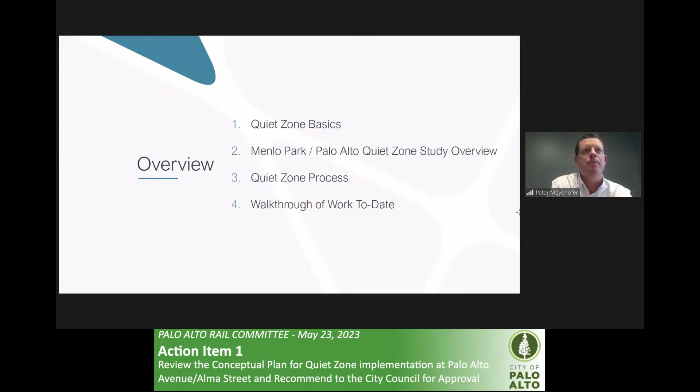Okay, so just a short presentation here to talk about the quiet zone feasibility study we've been working on with both Menlo Park and City of Palo Alto—where we're at, some of our results, and next steps in the overall project. So we'll start with the quiet zone basics: what is a quiet zone, the specific study we're looking at in relation to Menlo Park and Palo Alto, the quiet zone process, and again where we're at to date and what would be left to bring this project to a conclusion.

So just some basics. Why do trains sound their horn? Railroads are regulated by the Federal Railroad Administration, the FRA. The FRA requires train operators to sound their horns as they approach areas where the railroad intersects a roadway, a railroad crossing. The train horn acts as a fail-safe in the event the warning devices, gates, or bells don't work or don't prohibit a person or vehicle from entering the crossing.

The train horn is essentially supposed to be loud enough to catch attention, usually a specific volume somewhere between 96 and 110 decibels. In addition, operators have to sound their horns beginning about 20 seconds prior to entering the crossing.

A quiet zone is a section of railroad in which the train operator does not need to sound the train horn as it approaches a crossing. For a quiet zone to be implemented, a crossing or set of crossings must meet certain safety thresholds as determined by the FRA. Most crossings would not qualify for a quiet zone in their current state, so upgrades are typically needed to make them safe enough that a horn does not need to sound.

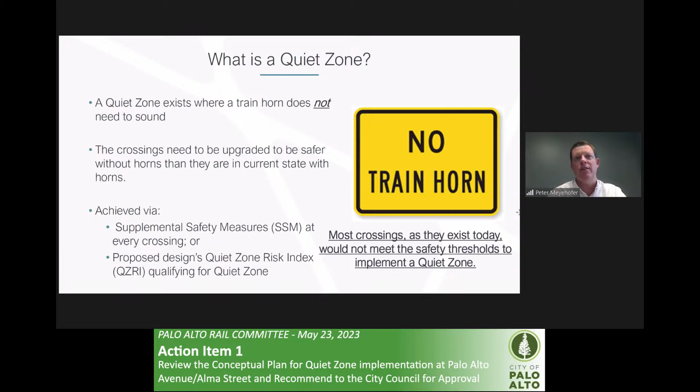This is achieved by adding supplemental safety measures, or SSMs, at the crossings, and ensuring that the overall quiet zone risk index, measured by specific FRA formulas, for the crossings or set of crossings qualifies under the FRA guidelines to be a quiet zone.

So the process - we're in phase one of the study still, but getting close to completion. The four main components are agency coordination, putting together concept design based on input from agencies and stakeholders, public outreach including meetings like this one, and a final report. The future phase would include implementation, permitting with CPUC and Caltrain, putting final design construction documents together, getting funding, and then construction and final FRA certification.

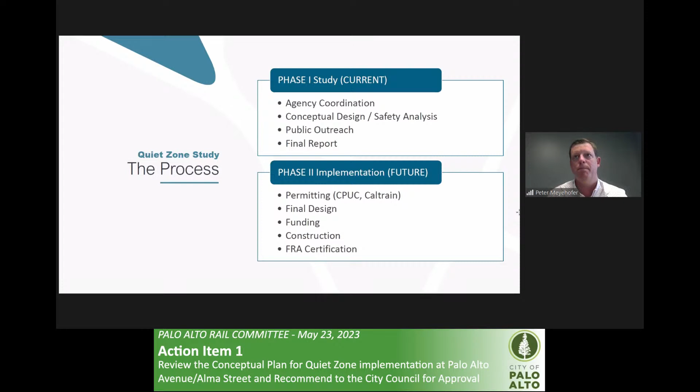There are a lot of stakeholders involved with any rail corridor, as you're aware. This includes Caltrain, Caltrans, FRA, CPUC, both cities, and Union Pacific Railroad, who has rights in the corridor as well. All of them were invited to our field meetings, doing a field diagnostic meeting at each of the crossings that were part of the quiet zone study, which we'll talk about.

The quiet zone being discussed here this afternoon spans about 1.5 miles, beginning at Encinal Avenue in the north and ending at the Palo Alto Alma Street crossing in the south, in the city of Palo Alto. The quiet zone as a whole would encompass railroad crossings at Encinal, Glenwood, Oak Grove, Menlo Park Caltrain Station, Ravenswood, and the city of Palo Alto's Alma Street crossing.

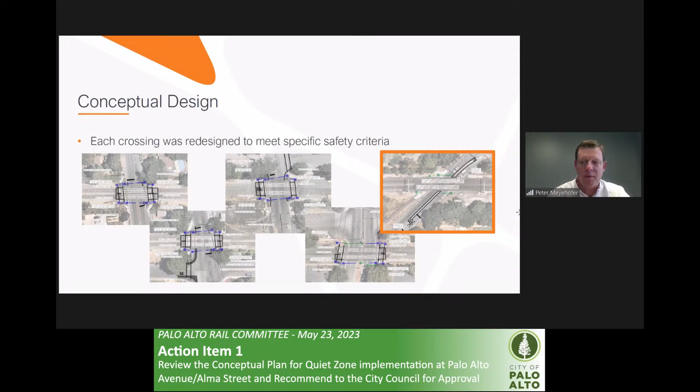The main improvements are sometimes sidewalk realignment, and typically with all of them, refreshed roadway striping and updated signage. The 4-quad gates are typically the improvements needed for the Menlo Park crossings. However, for the Palo Alto Alma Street crossing, we are only looking at having to do a raised median - we will not need to do 4-quad gates there.

All of the crossings are going to have refreshed roadway striping and updated signage. Sidewalk realignment is typically required where you have the 4-quad gate installations, due to the added gate assemblies that are put in, and as a result, the sidewalk realignments are needed. However, for the Palo Alto crossing, where we're not doing a 4-quad gate system, we won't need to do sidewalk realignment there.

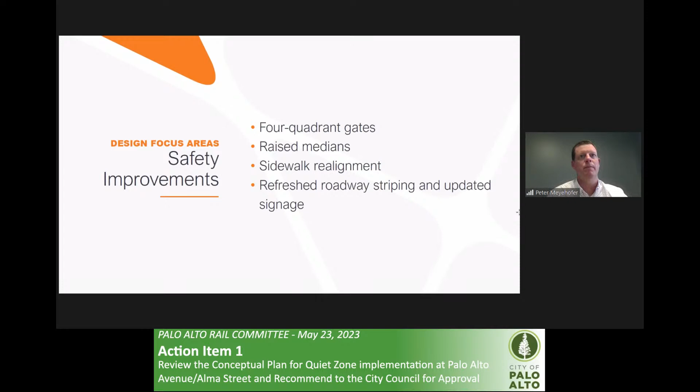Here's a quick graphic describing what a 4 quad gate system looks like. It essentially seals a rail corridor from vehicular traffic and the potential for vehicles to drive around the gates if there were only 2. Four quad gates are a typical supplemental safety measure that reduces the risk associated with a crossing under FRA guidelines. These measures are only being proposed at the Menlo Park crossings.

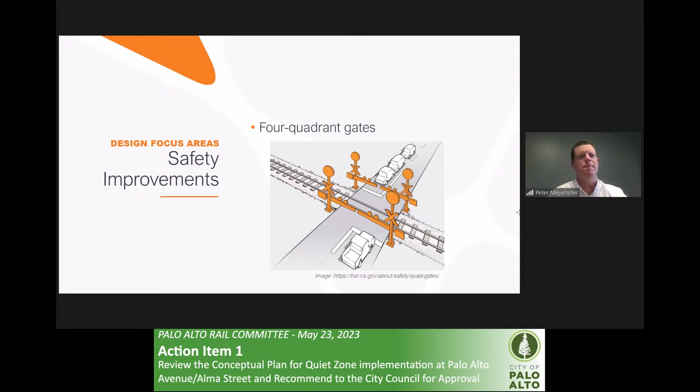Raised medians, designed high enough that a standard vehicle wouldn't want to drive over them, act in a similar manner to a 4 quad gate system, but with less infrastructure and signal requirements, and therefore generally much less costly. It still prevents vehicles from driving on the wrong side of the road to move around the gates for the 4 crossings within Menlo Park, but is the main safety improvement for the Palo Alto crossing. Raised medians are another acceptable type of supplemental safety measure that reduces the risks associated with the crossing under FRA guidelines.

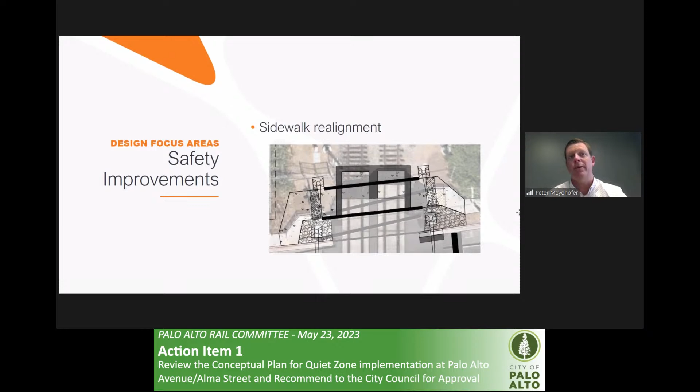With all the crossings, we'd be looking at just doing refreshed striping and marking on the roadway, and new signage. Sometimes signage is out of date, not to standard, or not in the correct location, so typically all the crossings will have upgraded signage and striping. This is also a typical requirement from regulatory authorities for a quiet zone corridor.

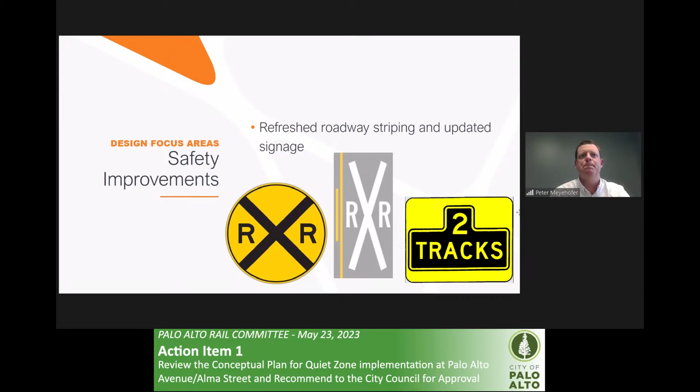At Palo Alto Alma Street, we proposed reconstructing the medians near the crossing to meet federal minimums with respect to both length and height. This crossing is the only one in this project where reconstructing the medians is actually a viable option. Because we're proposing to install new medians, the 4 quadrant gates are not necessary here, nor is a reconfiguration of the sidewalk. So what you see there in green, those are the existing.

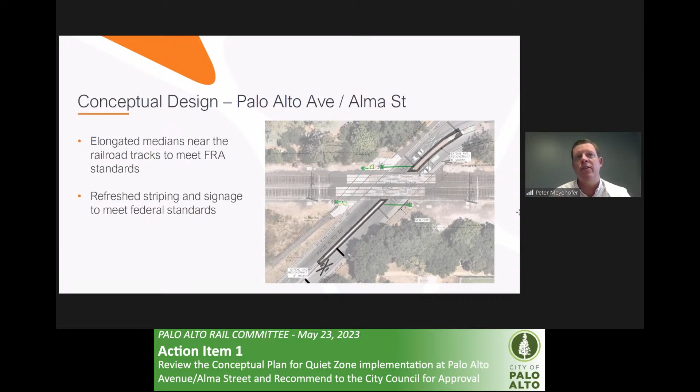Another component of this first phase of the project was public outreach, where we had public meetings with the general public. We've had a number of meetings with both City of Menlo Park and City of Palo Alto boards and committees. Throughout the process we've been getting good feedback and implementing that into our designs, which will help us finalize where we're at with this current study. That will be a final report summarizing everything we've discussed in the concept designs, shown on the next slide. The final report summarizes everything we've done, the concept designs, and provides recommendations to the cities on what would be needed for implementing the quiet zone in both municipalities.

The next phase, once this is done, would of course be final design and permitting through CPUC and Caltrain. With CPUC, that would be the GO 88B application process. And of course, getting funding for the required work. That's it. Open to any questions.

Thank you. So first, let's see if we have any members of the public who wish to speak on this item. Thank you, Chair. We do have a couple of requests to speak.

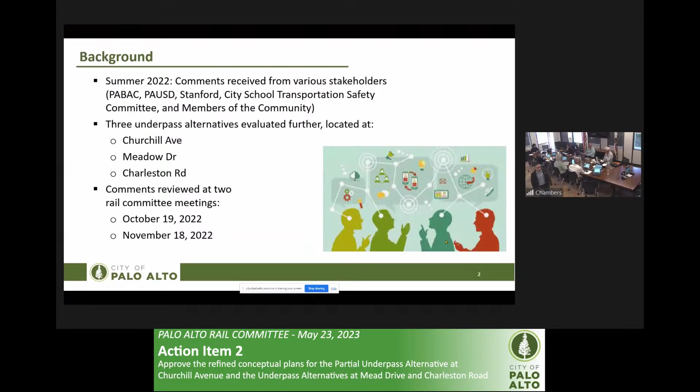I'll just briefly summarize again: in summer, some members of the community design engineers were involved in the early design of the grade separation alternatives. Seeking their feedback and comments, we conducted study sessions with the rail committee and got their direction on discussions of measures we could incorporate in refining the alternatives.

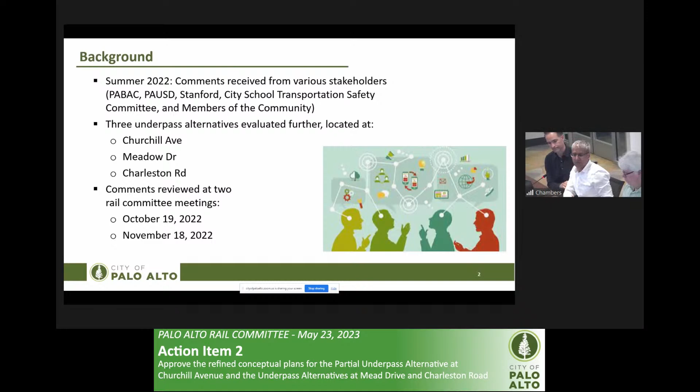So with that, Peter, you can go ahead and provide the updates.

Very good. Thanks, Ripon. I'll first want to start off — my name is Peter DiStefano, I'm with AECOM, I'm a civil engineer. I want to concur with what Phil said earlier about 2 years being a relatively short duration in the grand scheme. When I first started on this project, I didn't have any white hair.

Kidding aside, let's dive right into the design revisions. We're going to first talk about Churchill, and then I'll pause there. If you have any questions about Churchill, then we'll proceed to Meadow and Charleston.

On this first slide, we increased the ramp width in the center of Kellogg to provide a little bit more room for pedestrians and bicyclists, increasing it from 10 to 12 feet. We also met with the fire marshal in November, and to accommodate emergency vehicles, Kellogg was widened about 5.5 feet on each side of the road to provide 16-foot lanes, as you can see on the typical cross section.

Tree removals and relocation of the overhead electrical lines will be required to accommodate the widening. The back of the sidewalk will remain where it is today, and no property acquisitions along Kellogg would be required in this configuration.

It's not clear in my mind why there's a triple bike path between the actual tracks and the Palo Alto Sports Stadium. It seems there are three bike paths there, and one is offset in the center by height. I'm curious why that is.

Throw that back for a little more thought. I don't think that's quite an optimal solution there. I think you can have that intersection with a two-way bike path.

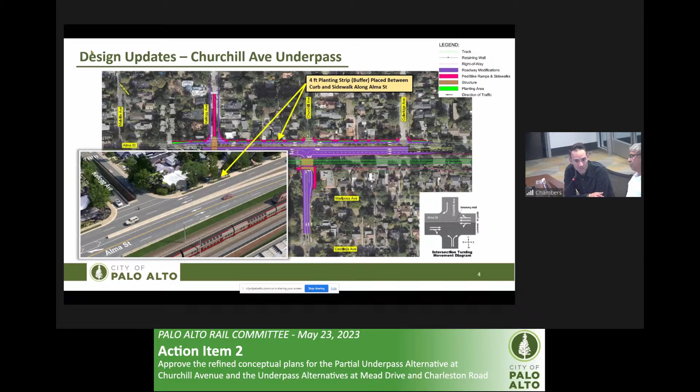Oh sorry, apologies - the current layout would need to go under what is existing bleachers partially. So it could be that the bleachers actually don't need to be relocated, they just need to be redesigned. It could be that we have bleachers going over part of this bike path - that's a possibility, just depending on design. But we haven't gone to that level of design at this early conceptual phase. It's just noting that the current layout would overlap with a portion of the current bleachers. Got it, so that's all kind of TBD.

And if I might add, on the current bleachers it's not really feasible to relocate them. I know those pretty intimately - I spent half a dozen years on the chain gang for the football team on that side of the field, the visitor side, and there's no room. So it either would be to reduce the size - if you were not able to build underneath it, you'd have to reduce the size of the visiting bleachers, or move the entire football field, track, and home field bleachers on the other side. So okay, I wouldn't hold my breath on that.

That's exactly what I was wondering, was how potentially involved, how big of an ask, that kind of thing. And I want to add another complexity to that - that Embarcadero bike path is also in Caltrain's right of way. So it's going to be a 3-party agreement and negotiation - not only city and school district, but also will bring in Caltrain and JPB into that conversation. So it's becoming more and more complex.

Got it, so it does sound quite complex on the Paly side, although I am sympathetic to the homeowners on the other side with the 4-foot buffer. We talked about that if we have that, the benefit is to the pedestrians being distanced from the car, and also the recycling bins. But I would suggest that if there were a way to make the pedestrians safe an alternative way, that perhaps we would even ask those homeowners - a decision that perhaps we should get feedback on.

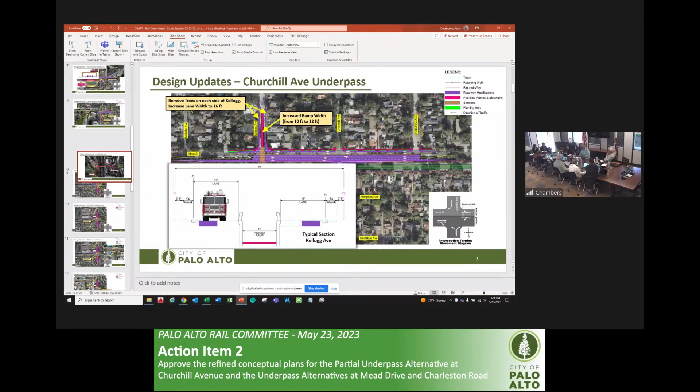But I'll add that in that context, we look at the groups of students trying to cross the tracks to get to Paly. In this vicinity, there are ones essentially north of Embarcadero, and then ones coming from east of there and south of Seale. The ones north of Embarcadero would be able to use the hopefully soon to be improved connection between Emerson and the underpass.

Maybe you can give us a little update, because that ties into this question Vicki was talking about. We had an update a few months ago that it was getting prioritized in the CIP, but I don't recall seeing that in the CIP from the recent budget hearing. Yeah, so it's actually contained within a larger CIP, completing design, finalizing our final design. I should say refinalizing our final design—it's really just updating it to current standards.

Ripon, do you have any other updates to that? Yeah, so you're absolutely correct, that is the connection that people to the north could make. Yeah, north, that was kind of my point, is a lot of them could go on the north side of Paly. And so really the south side, I don't know. There's a lot to like about this alternative.

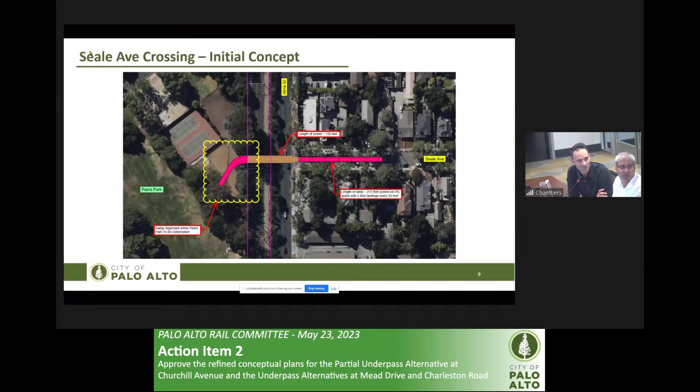But I think we should maybe hold a little bit on that and see where we end up. With this discussion of Kellogg and Seale, we might potentially not be talking about Kellogg anymore. Just right, like to kind of pursue that strategically.

If Gary Black is still on, regarding the question Mike Price was asking about that turn pocket, I just wanted to understand if the model allowed a right on red there during the modeling, because that makes a difference. Right now, part of the reason it backs up is that you have the train preemption that happens, right? But the idea is we will now be grade separated and we control the light. So part of the reason why that turn pocket is still more efficient is, number one, if they're allowing right turns on red, there's still a little bit of give.

The second question to Gary is, do we know if that light on El Camino and Churchill is controlled by Caltrans and not us? Going back to what Chair Burt was mentioning before, if we take control of the light at El Camino and we can pulse the Alma Churchill light and the El Camino Churchill light, then we have a much more efficient use, and maybe you could remove the turn pocket as long as you control the other light. But if you don't control the light, then you need the turn pocket for a right on red. And right on red is never great, particularly when you're coming out from under a tunnel situation. So I just don't know what was modeled, and maybe Gary can answer those two.

Yes, we assumed that right on red was allowed, and it is possible to do that. We haven't gotten into any details about the signal design or phasing operations, but with this configuration, it would be feasible to allow right turn on red. And the model is with the turns at El Camino being controlled by Caltrans, correct? In other words, we can't pulse those.

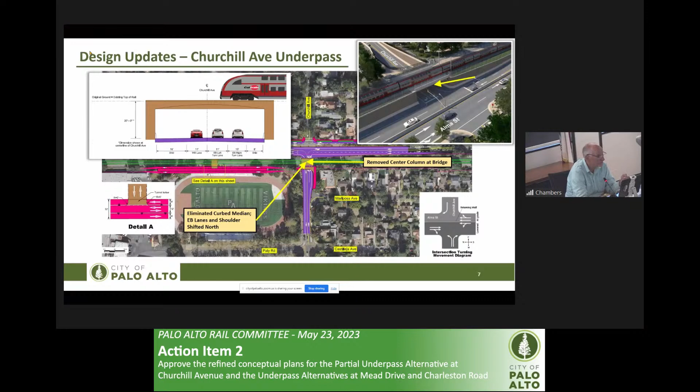Yeah, the part that I was following when you said dipping one side, would you say dipping one side, because Alma has it - let's see if I have a better picture. One lane is staying down, but we have a retaining wall, so only one lane is going down. Whereas if you have both lanes and the throughput on the other side, if Churchill on the other side of Alma also had to dip, then you have a whole different situation. Alma does not dip. Exactly, that's right. And the west side, the southbound, has a retaining wall, so it wouldn't benefit from not having to go down as deep.

Nadia has touched on something I wanted to understand. Maybe it's just in that refinement we can't really quantify yet, but as the starting point of the down ramp eastbound Churchill, if the bridge deck is reduced by perhaps 2 feet, how much impact does that have on how far back you have to go? I mean, you could go steeper, but we use that as a maximum preferred. I think there's also NFPA requirements that limit us to 12% at the most - National Fire Protection.

Remember we looked at that? Okay, yeah. And so, yes, I would like to add, Nadia, that the clearance underneath the bridge will be maintained, and from that point the transition will begin westerly towards that west leg. So the constraint point, the most western point, would be the minimum depth that you have to maintain under the bridge, and then go towards the transition. How much does that pull the whole underpass eastward, the starting point of the underpass?

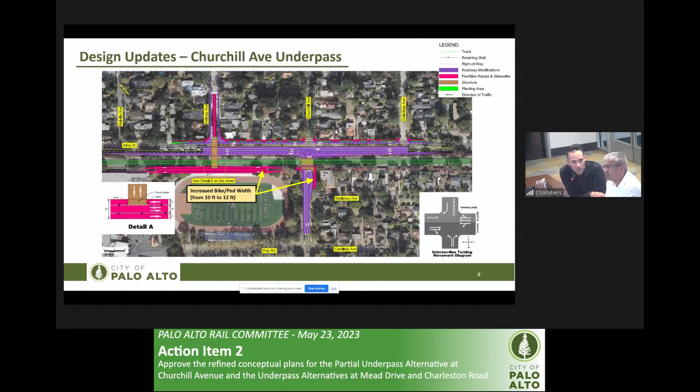Thank you for adding that context. That's one of the things Caltrain has worked with some of our neighbors on, bridge deck thickness as an example. That's typically something that gets refined a bit further along in the process. We're still in the conceptual design phase, as we'd call it, and that kind of thing is typically a little later in the process, unless you know you're going to be able to do it, which in this situation, we don't exactly know that Caltrain's going to let us.

But I think it's a really important question to get at the front. I don't understand why there would be any real barrier to it. In discussions preliminarily with Caltrain, they haven't expressed any apprehension about that. They've done similarly right down the road at Rengstorff. The sooner we start assuming we have a thinner bridge deck, the sooner we can incorporate more favorable refinements to the design.

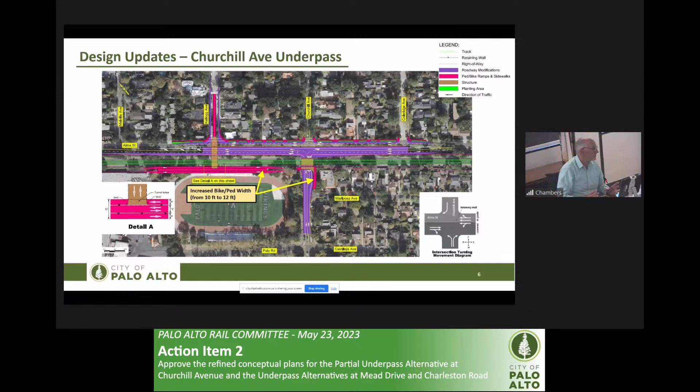By all means, assuming the minimum deck of the bridge we can accomplish, that's what we're aiming for. But up until now, for 3-4 years, we haven't incorporated that, and that's why I think it's really imperative that the sooner we do it, the better.

Vicky: I just want to follow up on what you were touching on, Chair Burt, about the additional 4 foot. I have it enlarged on my screen, looking at the green areas, that setback. I'm wondering what the genesis was of that, and if we explored other safety alternatives such as fencing or something. I'm just concerned about the public looking at this and thinking about this 4 foot taking, or whatever the right word is. I'd like to understand a bit more about how we came to this version.

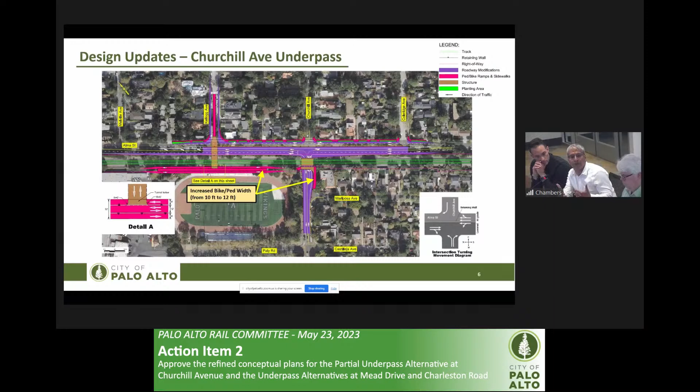Certainly, there were different options we looked at. Vertical barriers become a sight distance issue when exiting the driveway, so there's nothing we could add vertically, and even for the vertical option, it requires footings and other additional features. Based on discussions at the rail committee previously, this horizontal approach also provides opportunity for landscaping, making it nicer for those neighbors in the frontage, and it's still kind of an extension of their property. It's just that it can have a maintenance agreement where they maintain it, becomes like an extension of their property, but it requires that the sidewalk be adjusted.

This slide, the lower left rendering that's there—I'm wondering if we could pull up for context a rendering of what we had previously, which did not have that 4 feet, because I think that's really where your predecessors on the rail committee decided this was necessary, looking at what would be there without the 4 feet. Essentially, council member, what you had was just sidewalk and then road. So if you're walking as a mom with little kids and you've got cars zipping past and there's literally not a tree, not a barrier, nothing, that's why the conversation went towards: could we at least put a planting strip back?

As a walker, you're walking further inward, but it also allows for the garbage can issue. If I was living there, I would not want to drag my garbage cans all the way to the edge of the next street. So this allows for all of that, but without the hazards that Ripon pointed out, like having hard barriers. In London, they've got those cattle fence kind of planting strips, which was a better option than putting a hard fence.

When you say hard fence, you don't mean opaque all the way. It doesn't have to be a wall, it could be a slatted fence, and that still presents a concern. I'm more concerned about the safety thing, because honestly, I think being disconnected from Alma is kind of the point.

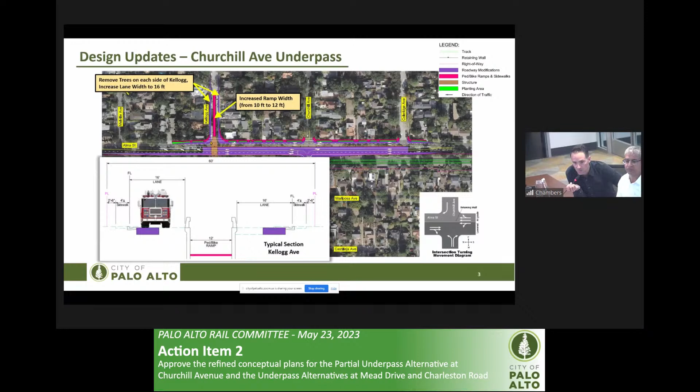So this typical section on the screen here at Kellogg would be moved to Seale, and it would no longer have that situation at Kellogg. So would we likely have to remove the trees on each side of Seale like here on Kellogg? Exactly - the geometry on Kellogg is almost identical to that at Seale, so whatever we would do at Kellogg, if we change the location to Seale, would need to occur at Seale.

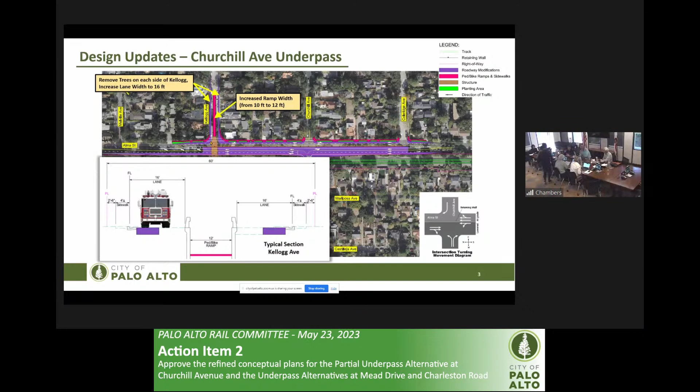All right, so should we move on to the Charleston East Meadow area to stay on schedule? Okay, I'm going to start with Meadow. Again, similar to what was done at Churchill, the width of the ped-bike ramps have been increased on this design layout from 10 to 12 feet in select locations, and I've pointed to a few of these locations here on the slide.

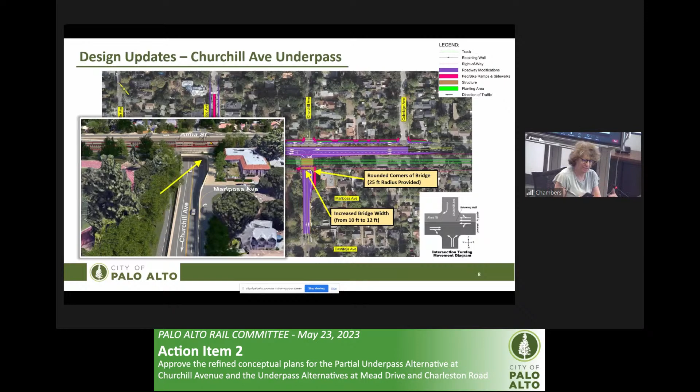I'm sorry. I just like to say, I sat through XCAP committee meetings for 8 months here, and there's new council people here, and quite a few different people, but there are two options. I mean, Mike Price's plan is here and everything's all done, but I just want to remind you, you do have option 2, which our city staff, Gary Black, had that whole thing all worked out: Churchill closure plus mitigations. I just want to remind you all that was the XCAP recommendation at the time.

And this, when you were discussing Seale for the bicycles, using Seale or using Embarcadero and how they're going to get across — since we have property on Churchill, I think you should look overall at the bicycle and pedestrians going from Churchill all the way to Stanford, all the Stanford people riding their bikes across. It's not just Pali people using Churchill to access Pali.

And I would hope that you would all kind of look at — we're a bicycle pedestrian city. The way this whole thing is going, with all the money going into this plan, it's cars, it's vehicles, they've got the priority. I'm not sure how the bicycle committee has worked out all the routes through Palo Alto,

but Churchill is only about 3 blocks long on the east side. That goes right into Stanford. That is a beautiful — okay, that's just my opinion — would be, if you were going to go back and look at it in terms of access for bicycles and pedestrians in Stanford and the community going across there, I think it's straightforward, a perfect place to have that Churchill closure with the bikes going under Churchill to go to Pali.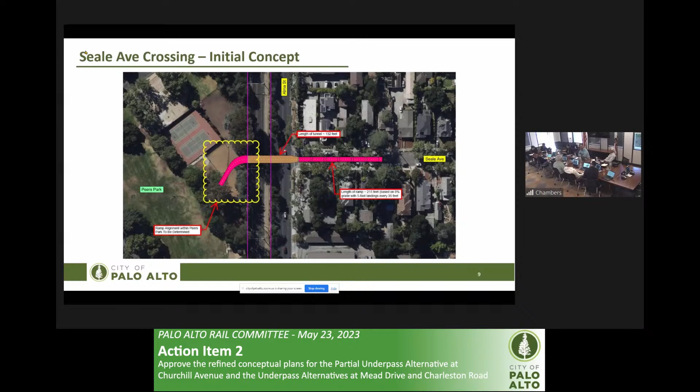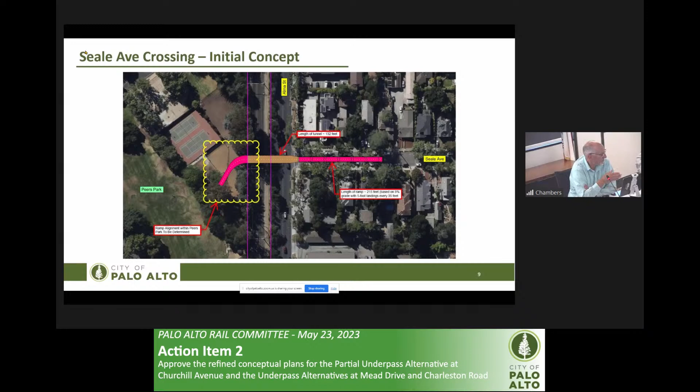I'll add one other context in my own mind, which is that I'm anticipating the prioritization of the dedicated bike and ped crossings would be related to which will be the first vehicular crossings we take on. I'm anticipating that because of the difficulties at Churchill, it's more likely Charleston-East Meadow will be done first. None of that's been decided, and that would drive the need for the South Palo Alto bike and ped.

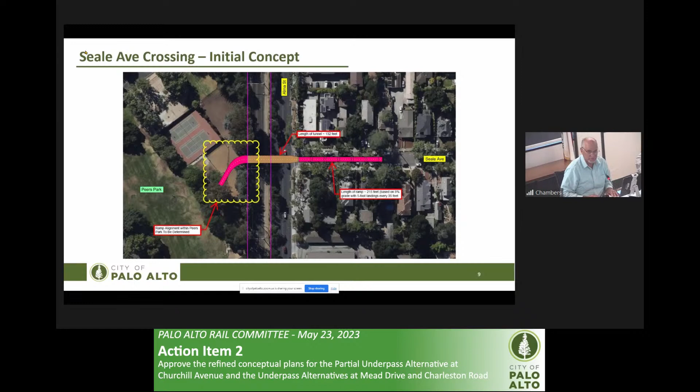I think actually the council direction, correct me if I'm wrong, was that you start with Meadow-Charleston and Churchill is actually second. I believe that's already part of previous council direction. Am I right, Steph? Yes, that's correct — Charleston-Meadow was prioritized.

Okay, great. Peter, you're back on. Sounds good. All right, back to Meadow — let me repeat this one real quick.

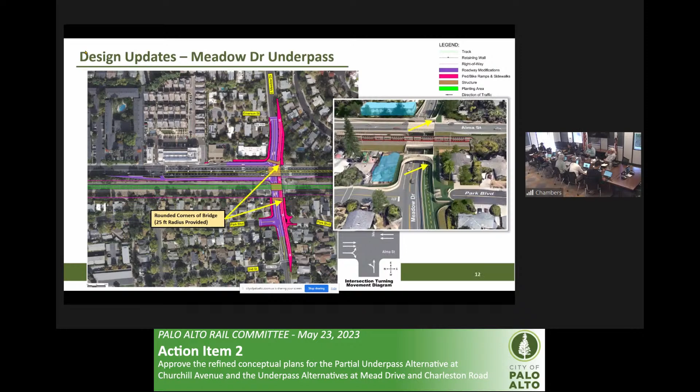Similar to what was done at Churchill, the width of the ped-bike ramps have been increased from 10 to 12 feet at select locations on this design alternative route. Similarly, the ped-bike bridge over Meadow has been increased from 10 to 12 feet. And for the 90-degree corners, again similar to Churchill, the corners have been rounded to provide better line of sight and turning movement for bicyclists — you can see that a bit better in the rendering here, the curved edge of the bridge.

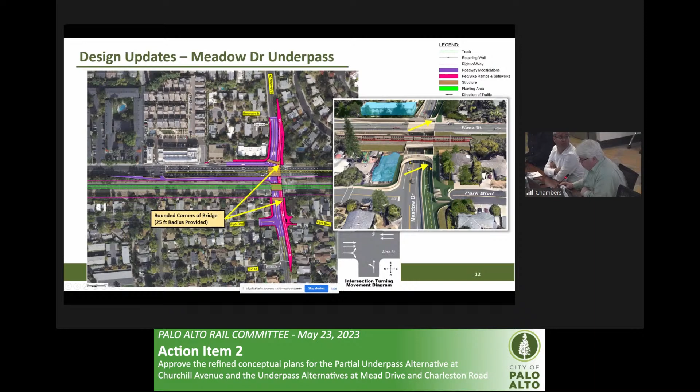I don't believe this was discussed at the November meeting, but we did update our renderings, showing a cul-de-sac layout as you go northbound on Park on the south side of Meadow, as noted where those yellow arrows are. That prohibits vehicular access from northbound Park onto Meadow because there's an elevation difference there, so we added a slide for that as well.

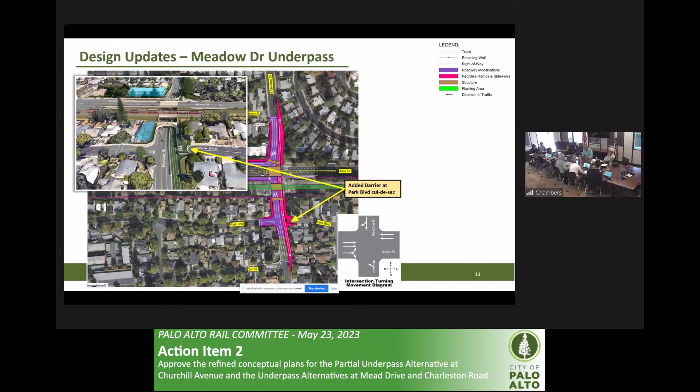Do you want me to proceed with Charleston, or do you want to stop here for questions about Meadow? Charleston. Sounds good.

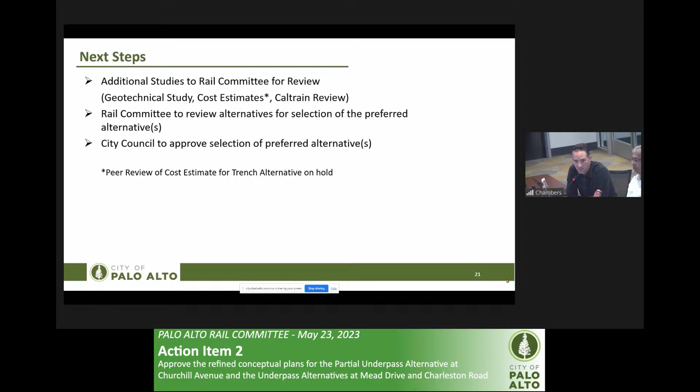With that, I guess we're happy to go on. Charleston segment.

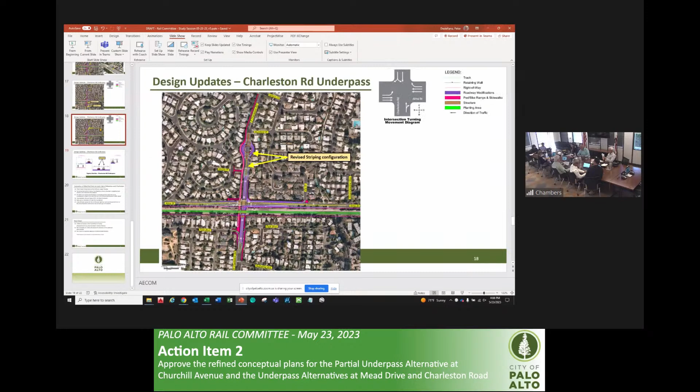So that's slide 18. This one here? Yes, that one there. Okay.

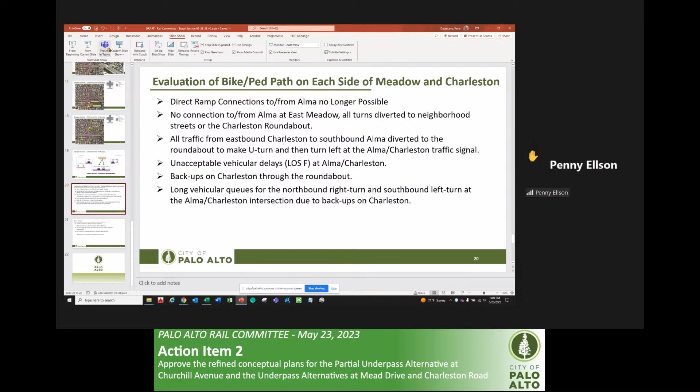So what I'm concerned about here is what we have now is a plan that eliminates a lot of turn traffic to get to Charleston to make those turning movements. If they can't turn at Alma Meadow, they're going to go through the neighborhoods, and those are school commute routes the children are using to get through the neighborhood and avoid Alma.

So have you looked at that? And what did you find? I mean, obviously it's overwhelming Charleston and that's not good, but how does the traffic get to Charleston with these turning movements removed?

So we'll go ahead and hear your comments and then let them respond afterward. It's not feasible with the changes we've made to actually accommodate bicycles on these streets.

But as you were considering the changes you were making, were you looking systemically at the school commute routes as well? Have we been doing that through this entire process? We should be doing this. And that's my question, and I'm done.

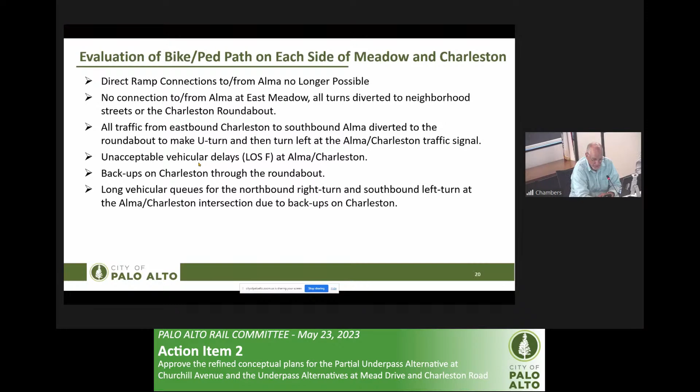Okay, thanks. Any other public commenters? Yeah, we did. Our next speaker is Steve Rosenblum.

Good afternoon, council members. My name is Steve Rosenblum. I live in Old Palo Alto, and at the last rail committee meeting, I spoke as a representative of a group of fellow Palo Altans who strongly support the viaduct as the best means of grade separation for the future of our city. At that time, I compared the Churchill partial underpass alternative to the viaduct and demonstrated that the viaduct is cleaner and simpler and allows all vehicular turns.

Today, we've heard more discussions about the complicated details of the hybrid alternatives at Churchill, Meadow, and Charleston, about the complicated traffic motions that are needed to accomplish bicycle-ped separation and accomplishing all the turns and traffic mitigations. I urge you to look carefully at the animations and renderings of the Meadow Charleston Viaduct that were removed from consideration on August 23rd, 2021 on the connectingpaloalto.com website.

And on that same site, they make a compelling case for the viaduct. There's no shoofly track needed, and Alma remains fully open during construction, because the width of the right-of-way allows construction of the viaduct to be shifted 60 feet to the east on the present right-of-way, and allows Caltrain to continue operation on the existing tracks during construction.

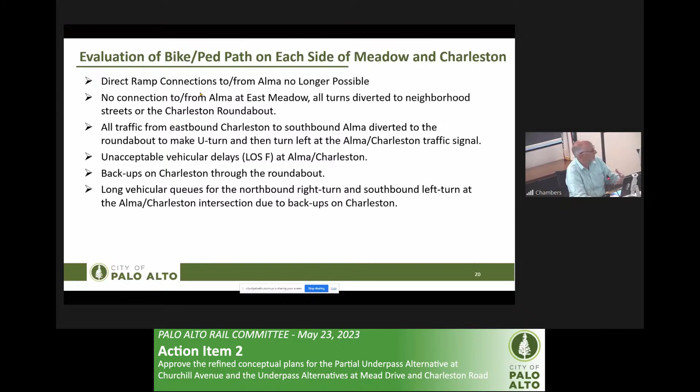Yes, that is something we have on our list to look at. And can you also comment on to what extent have all these alternatives been looking at safe routes to school? Yes, more broadly, what we're hoping is that any of these grade separations, as they currently stand, that's really the gain that every one of these alternatives does get. Some, like the viaduct, are really easy - it just lifts it over and everybody goes under, and you have potential right of way you can use underneath. Each of the different alternatives changes the bike and ped access, but keeps the same networks connected. That's kind of how I'd look at it from my perspective.

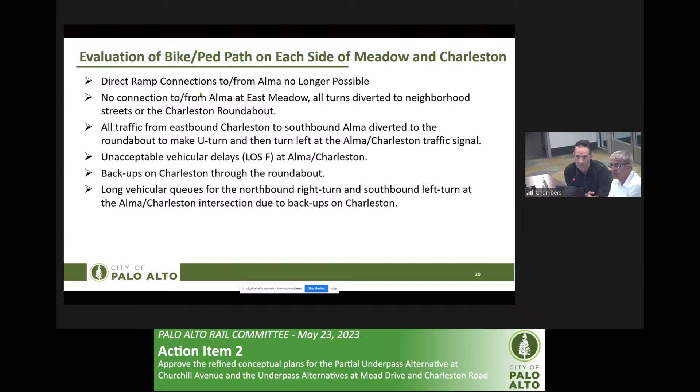I'll add one other thing - any of the grade separations give us the opportunity to have full... Regarding Penny Ellson's comments, realizing she wasn't able to read the full packet in advance, two members of the public also contacted me about this: it was unclear in the staff report, if you just read it quickly, that it made it seem like we were considering adding bike ped paths on either side of the alternative. Then you have Gary Black's analysis that basically shows it fails. So I think what was unclear was whether this was actually a change being made to the alternative design, and if so, why are we even looking at this if it fails?

It's really important to say this was in response to an idea brought forth by members of the public from the biking community, because the route is a bit more circuitous - why couldn't we have things on two sides? The work done by Gary Black makes it clear that it was going to fail the traffic alternative, which was my comment last time, because we talked about it in committee when XCAP looked at it - the underpass, with all its warts, actually performs the best out of all the alternatives when it comes to those same traffic studies.

Vicky, did you have anything? Just a couple of quick questions.

They're about Charleston west of Mumford. I know you mentioned that any property impacts would be the same as the design before, but since I probably wasn't around with the design before, could you tell me more specifically what those are? As I enlarge this, it looks like a couple of homes on the south side, perhaps? You want to tackle that one, Griffin?

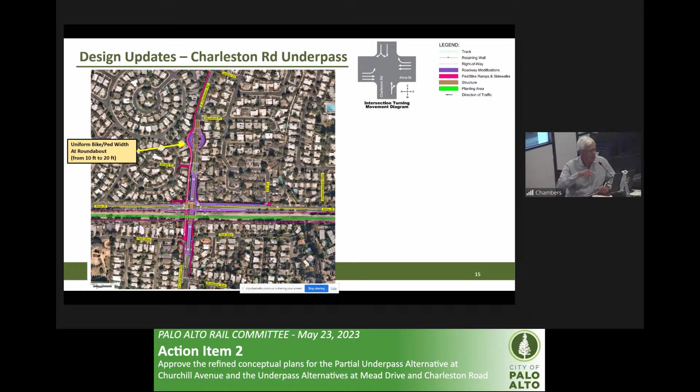That's correct. Let me pull up that slide. It just looks sort of bushier in terms of - I didn't know if you were proposing something. It may look bushier, but the concept is essentially similar to what we showed at Churchill. Yeah, I don't actually see the barriers there, I just see trees.

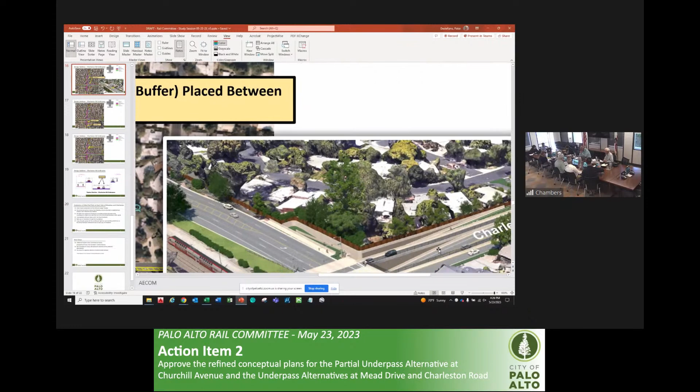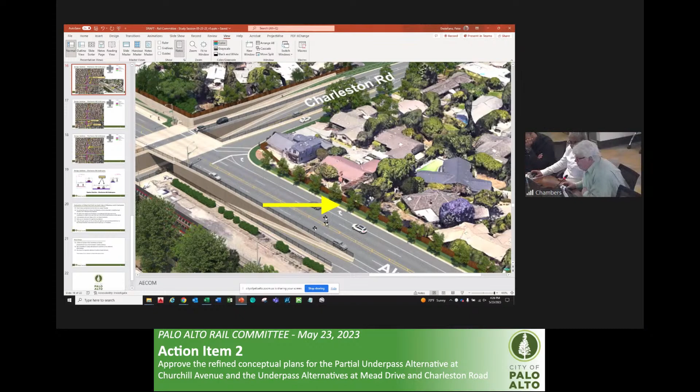Let me zoom it - there we go. I don't know what the maximum zoom is. Let me try 400. Oh yeah. I didn't know we could do that. You can do it on the iPad. Oh, I tried to do it earlier. You pinch your finger. I see. Yeah, it still looks greener there to me, so I didn't know if that was just a difference in the rendering or a difference in construction. It almost looks like there's 2 rows of trees, but maybe it's just an illusion, I'm not sure with the shadows. It looks like 2 rows of trees and a big fence.

I'm wondering if there was something particular about this phase of Alma that would require something different. No. It'd be similar to what was shown at Churchill. Okay, thanks, that's all.

Thank you, I just have a brief follow-up to my question before about the bike pedestrian path increase to 12 feet on the west side of Alma, on the south side, where we can only get so close to the homes. I assume we've checked to make sure that we accommodate that. Is that correct?

Yeah, we haven't done that, I'm not sure. Then that might be something we need to look into - how close we can get to those homes without doing a full acquisition.

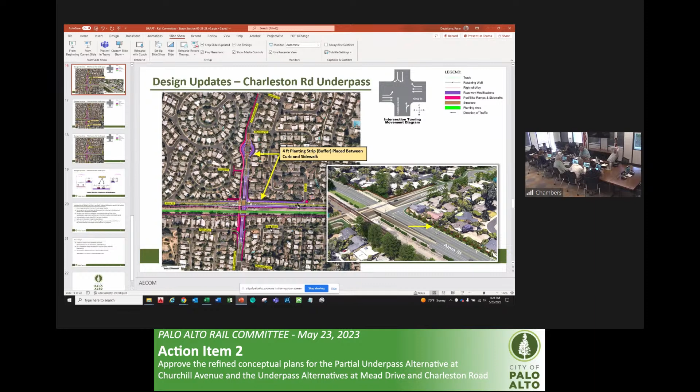That's exactly my point, because at some point I assume it would trigger a whole parcel purchase, which we're trying to avoid. Yes. And we might also consider some exceptions, because most of the time it would be the driveway depth that we'd need to be concerned with. We certainly are not getting into the building proximity, but the driveway depth also needs to be looked at, so that exercise will do it as well.

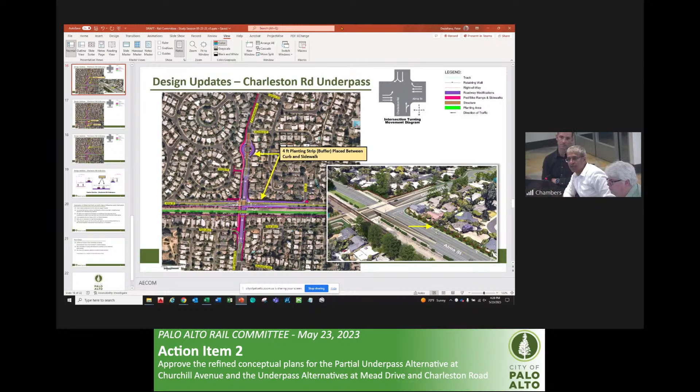I mean, I know we have to look from the city side, but to discern whether at some point the property owner would rather just have their entire parcel acquired than have a very short driveway and a very close bike path - how does one navigate that? Yeah, that's all part of the negotiations that would occur.

And just to point out, in this case those are actually the backyards, because that's the back of the homes, not the driveways - on the south side of Charleston. See, if you look at the diagram. I was talking about the pink side, south side. That's where the bike path is widened. And I had assumed those were backyards, but they're on the north side. No - she's talking about west of Alma. Yeah, she's talking about west of Alma, I see.

Between Alma and south side of Charleston, I see what you're saying about the bike path. It got widened, and I was asking if it's getting pretty close to the homes there. That would be part of the negotiation. But is that the front side of the homes, with driveways implicated, or the back side? No, that's the front side—between Alma and Park, they're fronting Charleston, and the driveways are from Charleston. I think there was some confusion about which side of the tracks we were discussing.

So I did want to make sure I understand why we think the bike and ped path needs to be 20 feet. As a point of reference, from the Homer Tunnel down to Churchill, it's inadequate because I don't know the exact width, but it seems like it's about 8 feet.

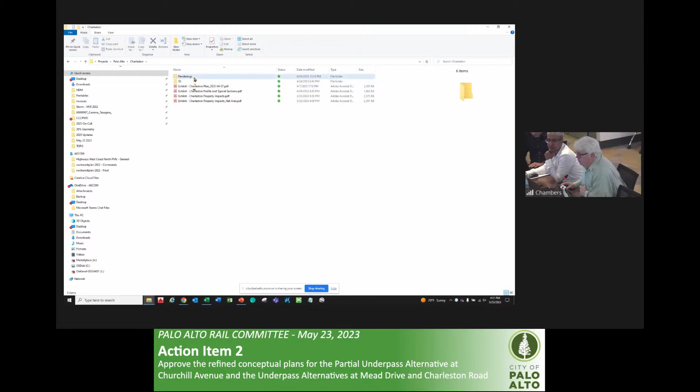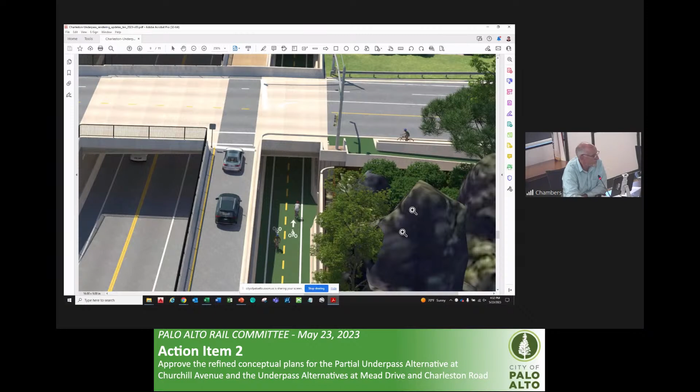Let me bring this up real quick. So the path you're talking about, the Embarcadero bike path, for example right next to Palo Alto, is just open air—there's no walls on each side. One consideration was, let me get a good image of it. On the Palo Alto side, with the shoulders, it's probably a good 12 feet. In this configuration, we're essentially going to need retaining walls on both sides for the length of it.

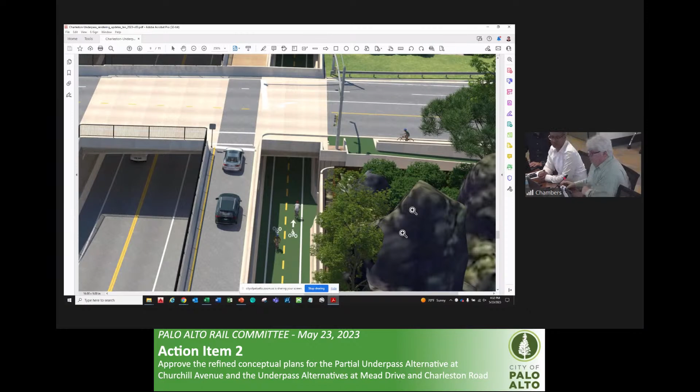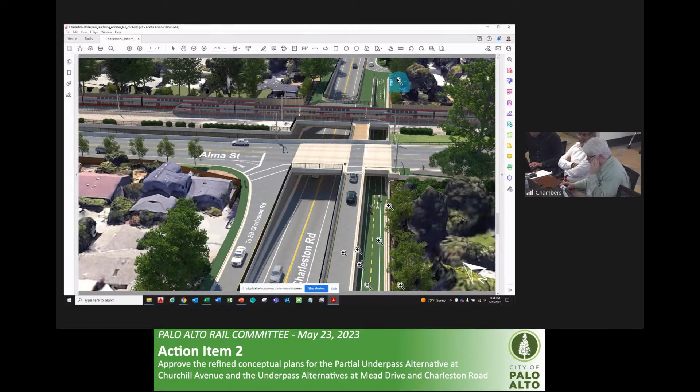Where are we in this slide? What streets are these? This is out here—I'm going to zoom back out. This is the Charleston layout, looking west. This is Alma, and this is Park from this frontage as well. There are backyards over here on this side, so there's walls on both sides. We thought 20 was appropriate, 10 feet in each direction.

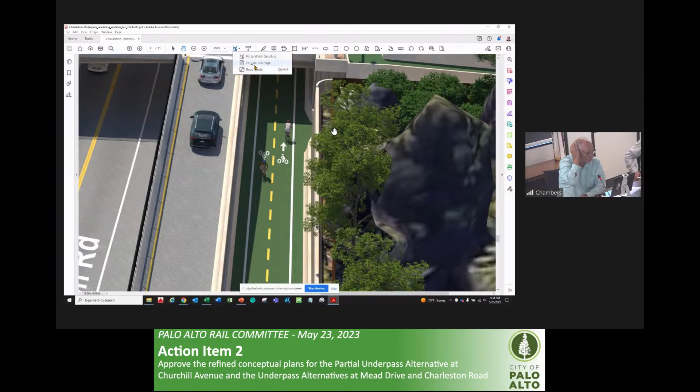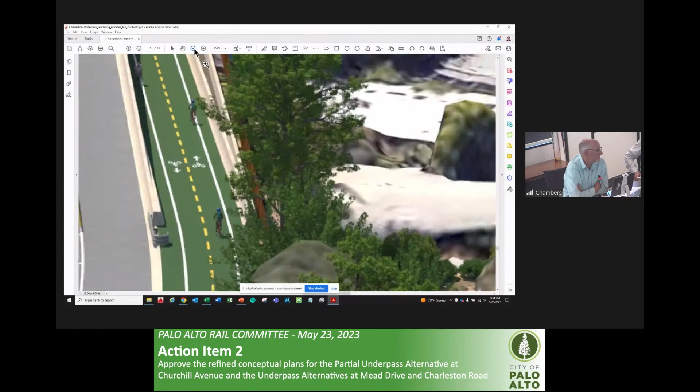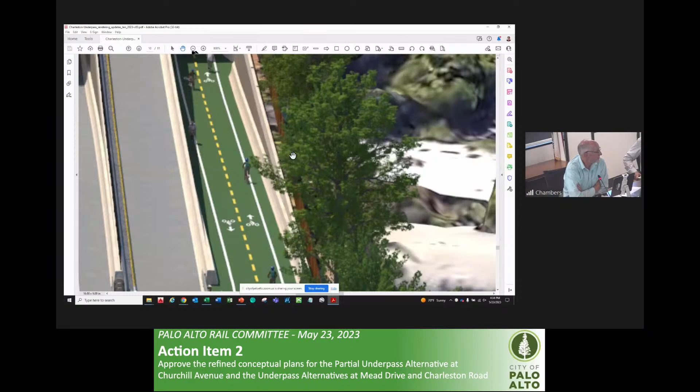If there weren't trade-offs, I would absolutely welcome a 20-foot bike and ped path. But we do have trade-offs, so it comes down to how significant they are, and what would still be safe. If you take the Homer Tunnel, we've got pedestrian walkways about 2.5 feet on each side, and then maybe 4 feet on the bike portion. This was actually loosely modeled after Homer.

But this is 20, and Homer is about 19 feet wide—is that in the open? I think the pedestrian section has to be at least 4 feet, I believe per ADA. Four sounds good. And then we're roughly 10 feet for the bike portion.

No, I'm talking about the actual bike path throughout, not the underpass—you had been referencing that earlier. Yeah, that's exactly what I'm talking about. It was a little bit over 10 feet. Interesting. So generally the bike path, class 1 bike path by Caltrans standards, is about 8 feet minimum with 2 feet clearances on both sides, about 12 feet in width total.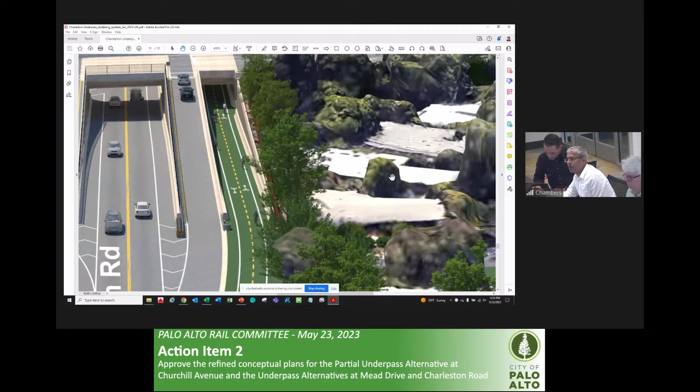This was established based on the Homer Tunnel kind of configuration for the bike path facilities here, and that was feasible to accommodate the high volume. I just want to make sure it wasn't just fully adequate and not more than that, given some of the other trade-offs, and it sounds like that's what we think is needed. Safe Routes to School input and PAUSD input probably guided that width, but if council feels 20 feet is certainly wide for a bike path...

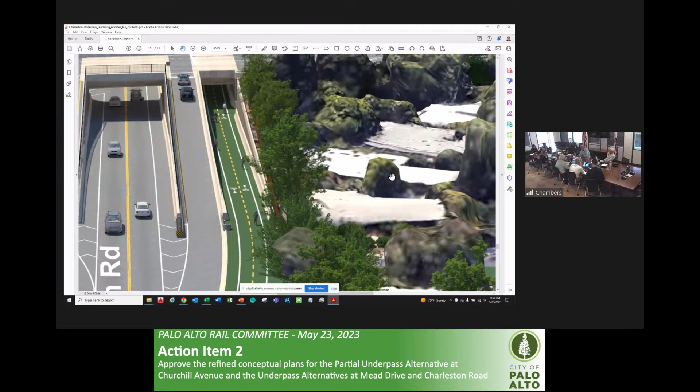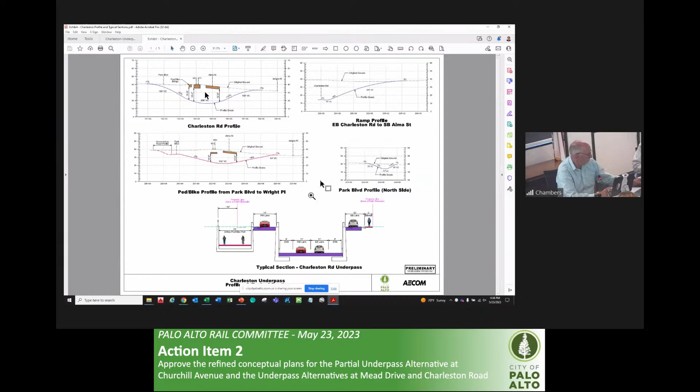We were hearing about that, and I just want to make sure we were providing what we need, but that if it's more than that, the difference was being recognized. But it sounds like we're convinced it's the 20-foot, and these projects get a little less impactful, not drastically.

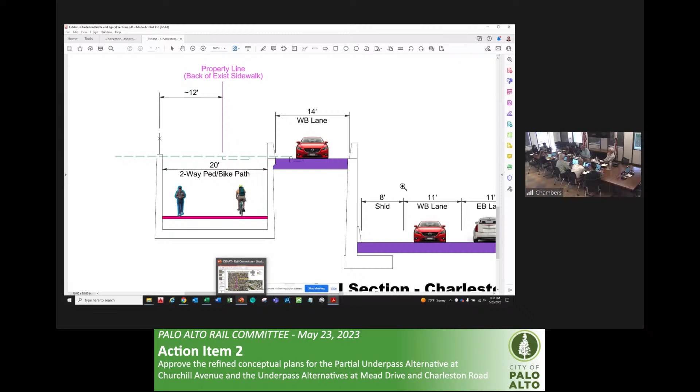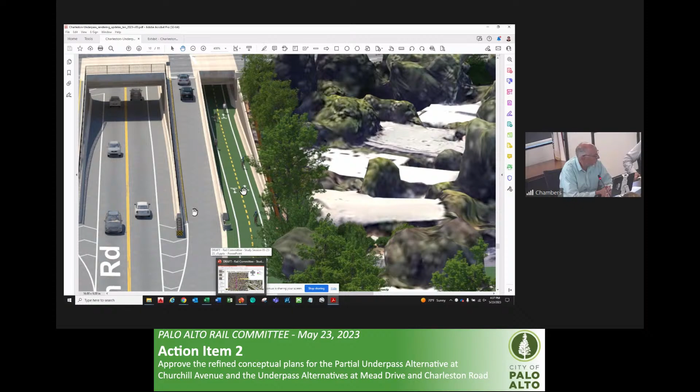I think the intent here was to have a separate bike path and separate pedestrian path. If there was a combined facility using bike and ped together, then definitely a reduced width could work, and we'd have recommendations for council consideration. Is this one where we should revisit the committee's thoughts on the viaduct?

I was actually just thinking about this earlier. It's possible. I was wondering if maybe a potential future item the rail committee might want to consider—I'd need to check with Tim to see whether that could even be something we do today. But look at any other alternatives, either for consideration or disconsideration against the revised evaluation criteria. And maybe that might be a possible path to making a recommendation.

We're reviewing and approving the revised conceptual plans. Would those not go to council then, like Nadia was asking about before?

Yeah, so I don't think these need to go to council. I think that's actually your prerogative as well. What I would suggest is when the rail committee wants to make a recommendation—as an example, if it wanted to recommend that council select this as a preferred alternative, and maybe consider this as a preferred alternative with this refinement—does select the partial underpass as a preferred alternative with Seale or Kellogg as the selected alternative. I think that's the potential path that would make sense in order to do that. But open to your suggestions as well.

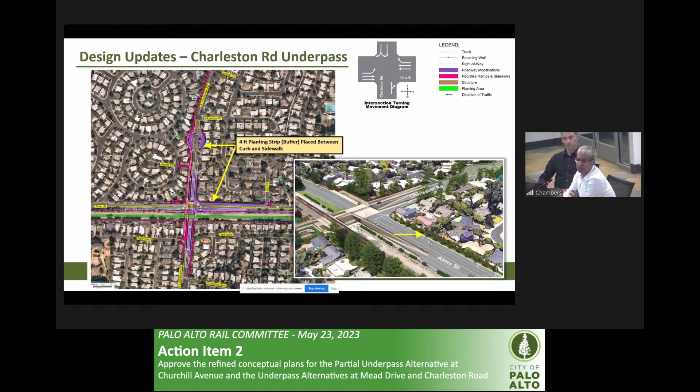Specifically, Elizabeth Alexis and Eric Nordman, I know, sent in comments. There was one more, a total of 3 comments that the rail committee received, and I was forwarded them. If you had a chance to review those, because I know those are people who have put some serious... Yes, but I guess what specific question or comment within it - I don't have them in front of me.

It relates to the fact that we were waiting for those dot maps, so where do these bikes go - we're looking at the width of this bike path without really understanding. We understand where the main traffic movements are, and that the underpass has been designed for that, but we have not actually considered where the majority of the bikes are coming and going from. The assumption has been that it's on the north side of Charleston and the south side of Meadow, but one of the things in there is actually doing a grade separation study for bikes and pedestrians only. I don't know if the concept now is that would be looked at through the bike-ped master plan, but the idea of trying to look at the O&D of most of those bikes and what the needs would be, and how that might change the design, is not something I think we need to do for this phase.

But certainly after Caltrain takes a look at the general numbers, you're going to need it for the next phase. That also changes the traffic studies for later, so you're going to have to redo a lot of this stuff anyway. It's okay to just put these in with caveats and notes that, hey, when we look at the designs again, we should consider the dot maps, we should consider the new housing allocations, we should consider those. But maybe it's not necessarily appropriate to change any of the designs now, for whenever we pick up this next piece - that would be my suggestion. That's it.

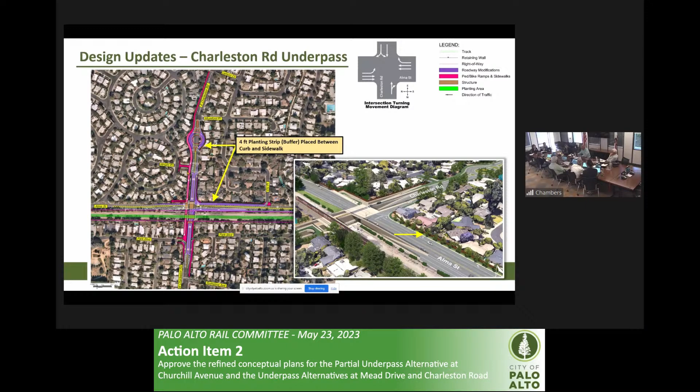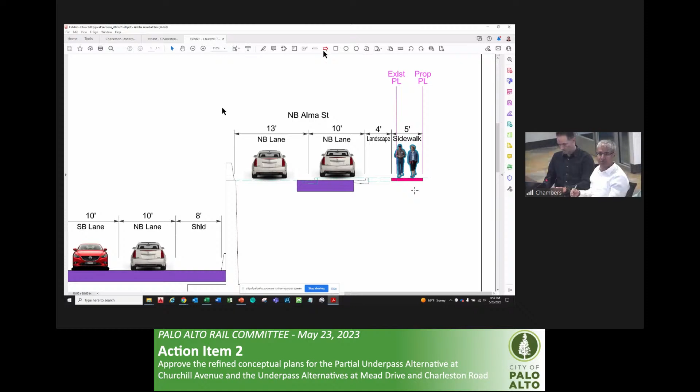So originally the right of way is behind the sidewalk, new landscaping buffer. The total area that we have is from the face of curb, 9 feet. That requires an additional 4 feet of the property from the fronting property owner. I think I didn't say that well. The roadway is in the same spot. We may be taking 4 feet of property, which I don't take lightly.

But in terms of it, it's basically swapping where the sidewalk and the grass was. It's just that obviously when we do that, the city gets that extra 4 feet where the sidewalk now is. Is that right? Yes. So originally that 4 feet of grass belonged to the property. I've lost track of what the question is, but yeah, just wanted to clarify.

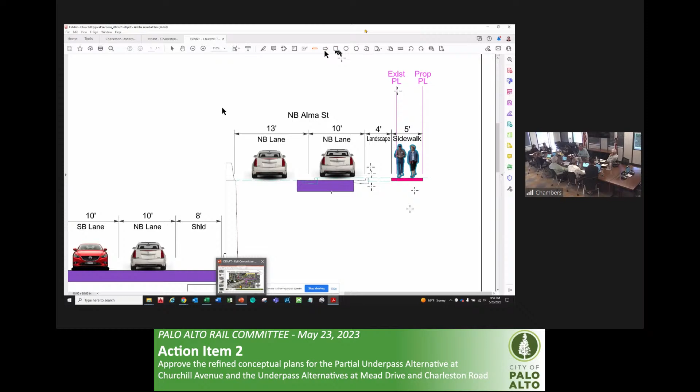Yes, okay. So it sounds like we have consensus on the new buffer proposal. I don't think there's any other... our attorney on what the language should be for a motion, and just if I could recommend that it would be to direct staff to make these refinements.

We'll see if there may be some minor improvements as presented, like we talked about increasing the width of the bike path from 10 to 12 feet.

I thought that would be within the refined conceptual plans. That's already there, right? Got it, see the motion? We'll see if they're working on it. The attorney said that sounded good to him.

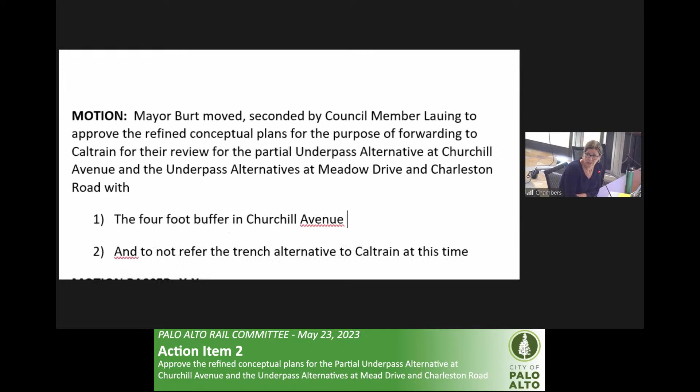If I may, anything related to the trench — if I was a trench lover, I would be really upset that you just said that. So I don't know that we can do that in this kind of motion. I understand the intent and I don't want to spend any extra dollar. That's why I was suggesting that as staff, we could just decide that.

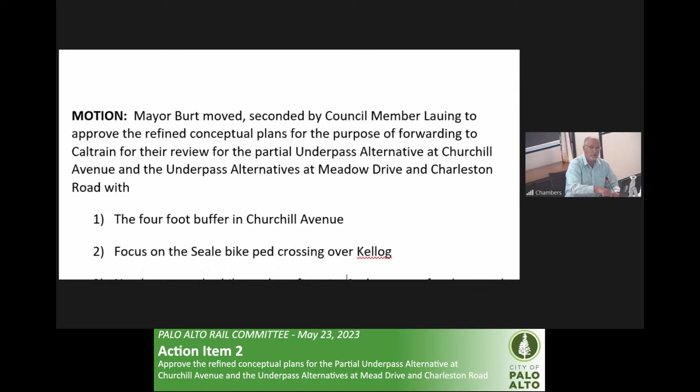You can decide the order. We'll hold on, it's this at this time. So what we are doing is affirmatively referring to things that were agendized and clarifying that we're not referring something that wasn't agendized. Okay, let's see how this reads. We'd say with the following.